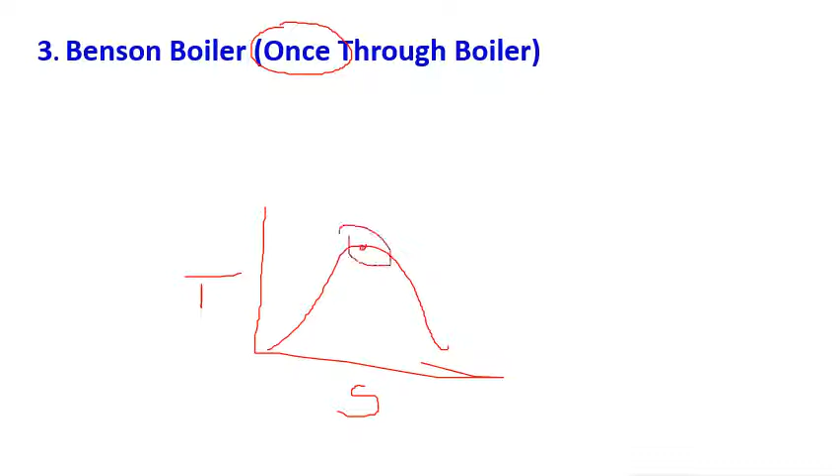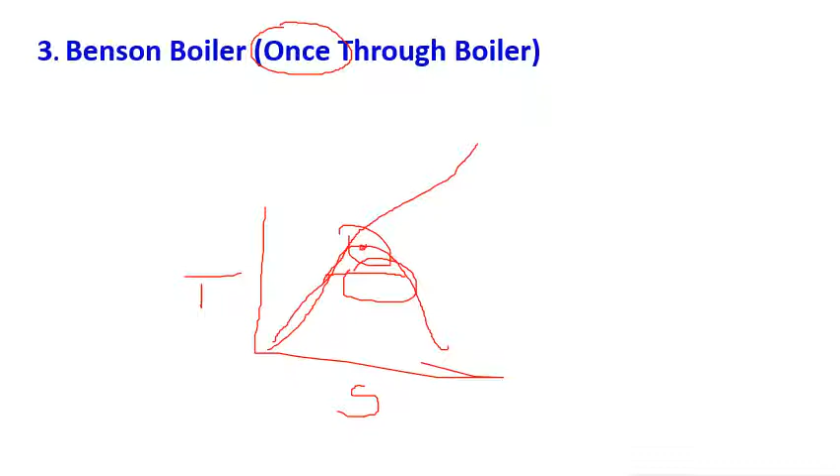Once through boiler means, as we have seen in the TS diagram in the earlier lecture, at 221 bar, the critical pressure, if I am taking water to saturated condition, it passes through stages. But if it passes above that point, there will be no phase change. There will be a sudden change to steam. That is what happens in the Benson boiler, called a once through boiler, where I don't have any drum.

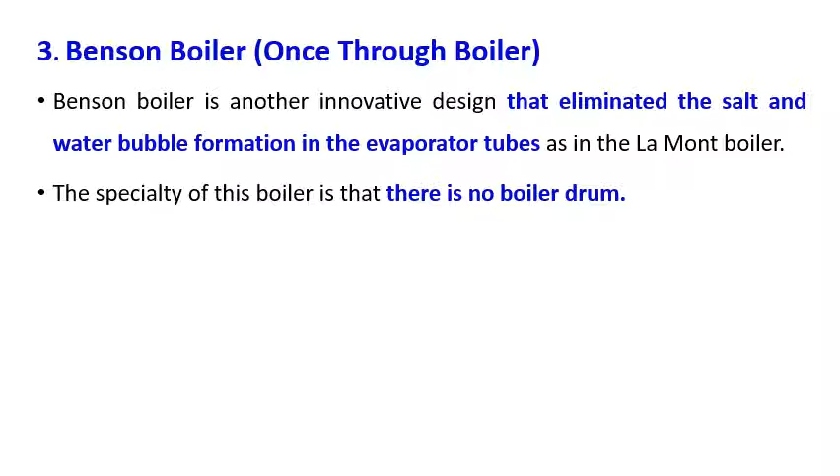The Benson boiler is an innovative design that eliminates salt and water bubble formation. The specialty is, as told, there is no boiler drum. If there is no boiler drum, the cost of the boiler reduces. The drum is the most weighty part of the boiler, so the weight also reduces, and erection during the initial period, which requires cranes, is also reduced. So overall, if the boiler drum is not there, this is the advantage.

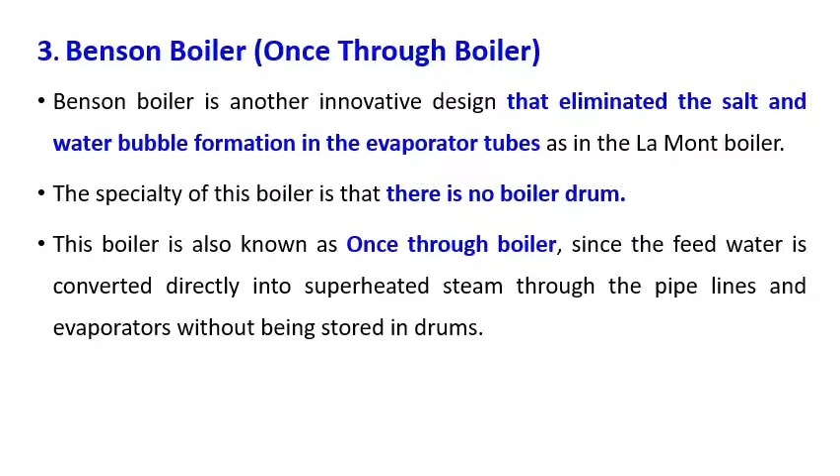This boiler is also known as once through boiler. Whenever there is no drum, it is called a once through boiler, since the feed water is converted directly to superheated steam through the pipelines, evaporated without being stored in drums. Earlier boilers like La Mont boiler or Loeffler boiler had steam drums, but here the steam drum is not there.

It passes to the radiant evaporator, then moves to the convective evaporator, then to the superheater, and the superheated steam goes to the turbine, the prime mover. The flue gas going out still has heat content, so I use ambient air through a blower or forced draft fan to trap that heat, which increases the efficiency of the entire system.

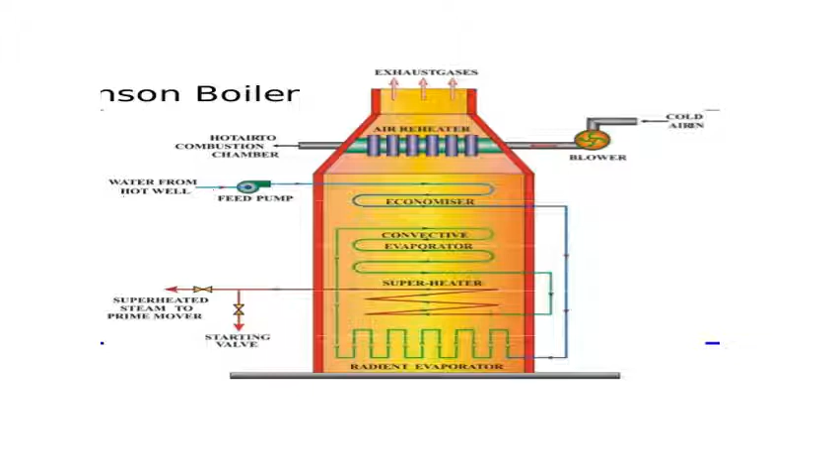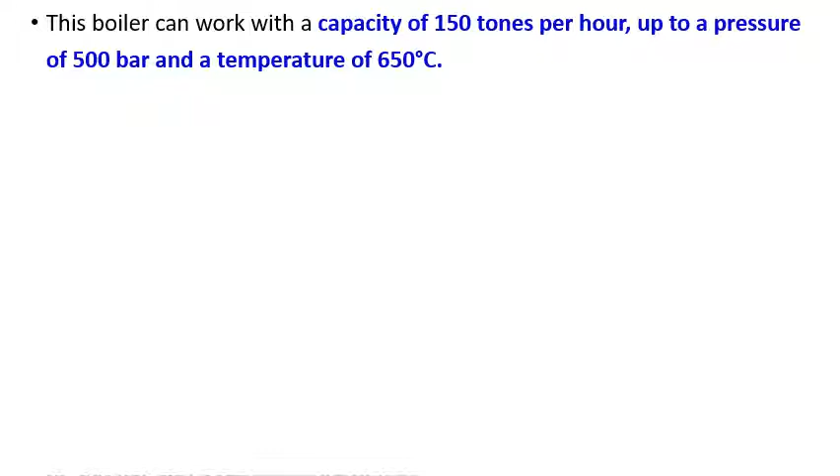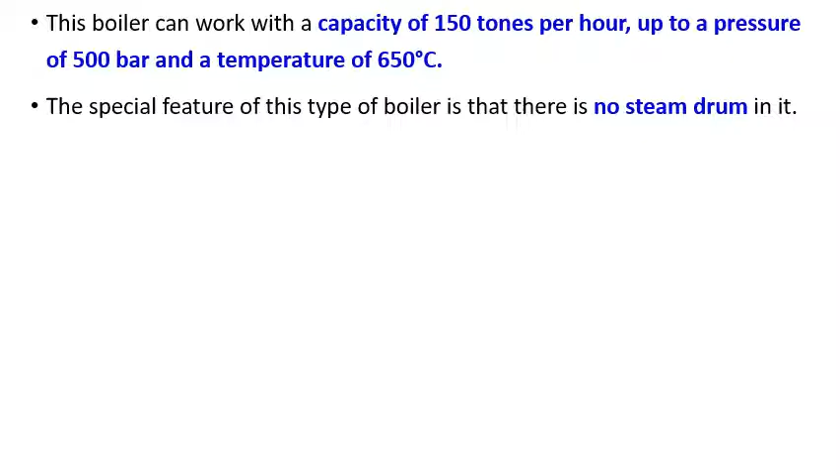Let us see the working. This boiler has a capacity of 150 ton per hour, and works at a pressure of 500 bar and 650 degree centigrade. 221 bar is the critical pressure, so this is much more than that. As already discussed, it is a drumless boiler.

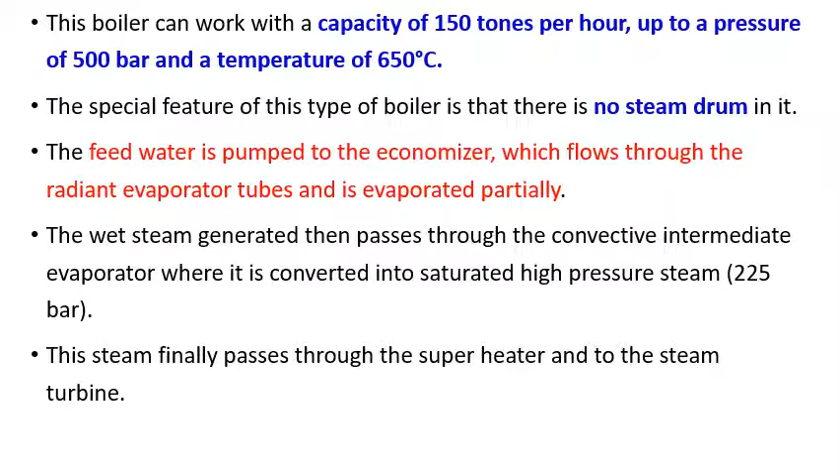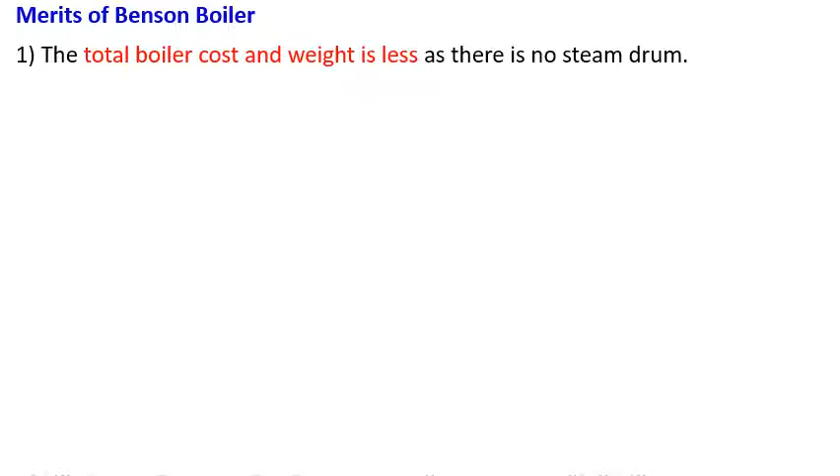Let us see the merits of the Benson boiler. The total boiler cost reduces since the drum, as told, is the costliest part, and erection to height also requires more time, so that has been avoided. The Benson boiler occupies lesser space area. All the joints are welded, and because of the lesser number of components, erection will be faster, giving flexibility for doing welding jobs for the tubes.

As this boiler works at high pressure, at 250 bar, there is no danger of bubble formation even when sudden fall of demand occurs. Possibility of explosion does not arise as there is no boiler drum. The Benson boiler can be started very quickly from cold.

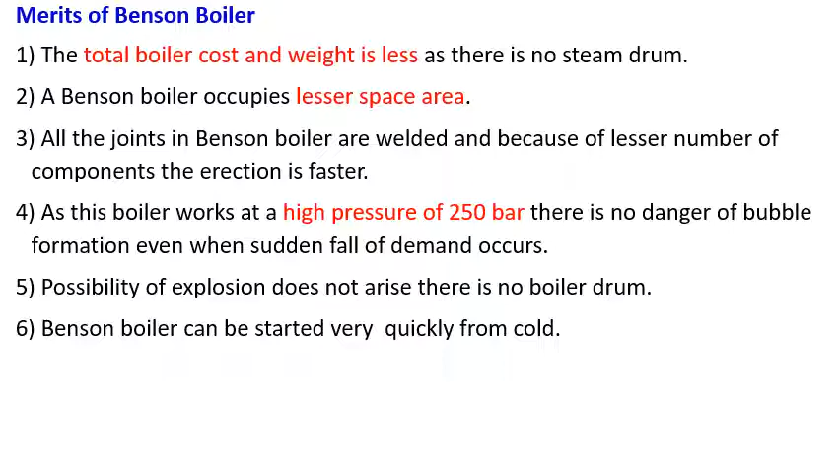Let us see the demerits. It has low steam capacity, hence not suitable for high power output. So it can be used for conventional purposes and for high pressure, but it cannot be used for high discharge.

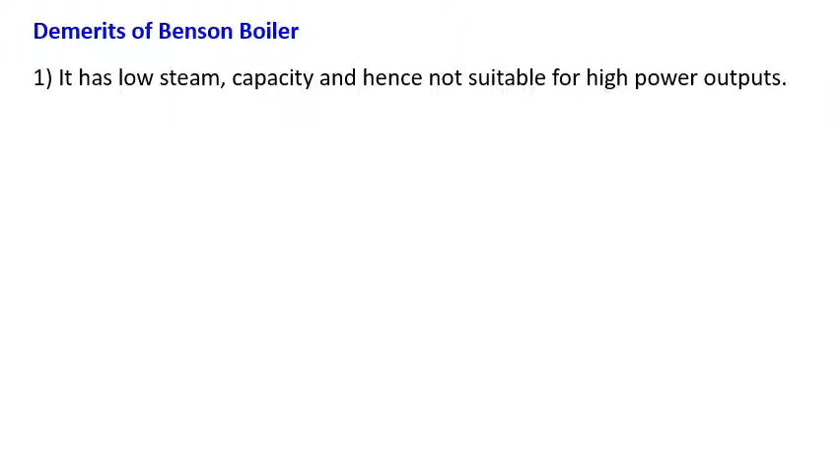There is possibility of overheating of the economizer and tubes. Since the drum is not there, risk is also there. You cannot say it is without any risk - risk involvement for explosion will be there.

In the drum, what happens? Generally we maintain 40 to 50% of the water level. So suppose in the drum, if the pump trips, I have got a little more time to play safe before any explosion, or I can start a spare pump.

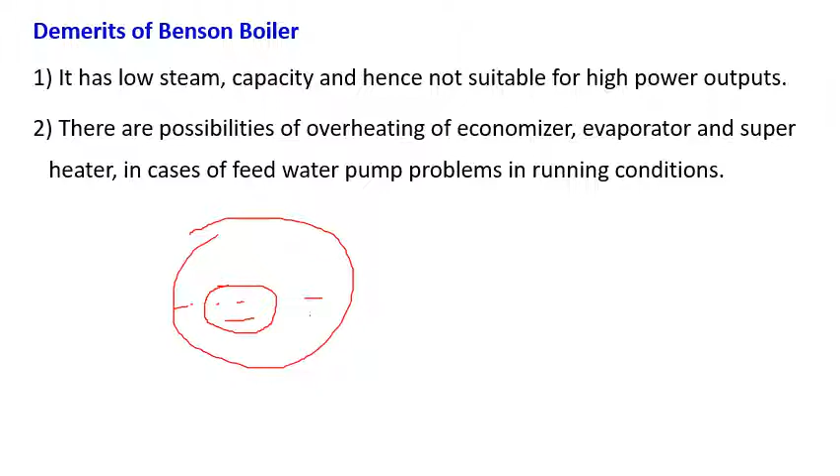I can think about alternative measures, but when it is in the Benson boiler, I cannot think about any alternative. Hence, the risk involved will be more. It cannot meet the sudden rise in demand.

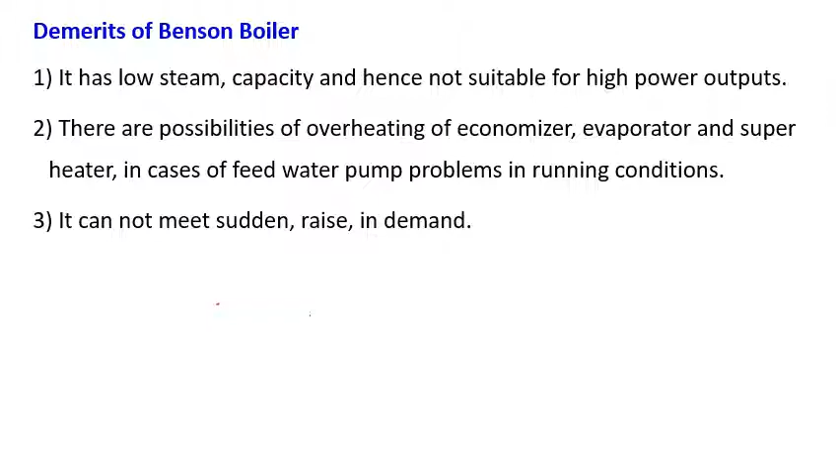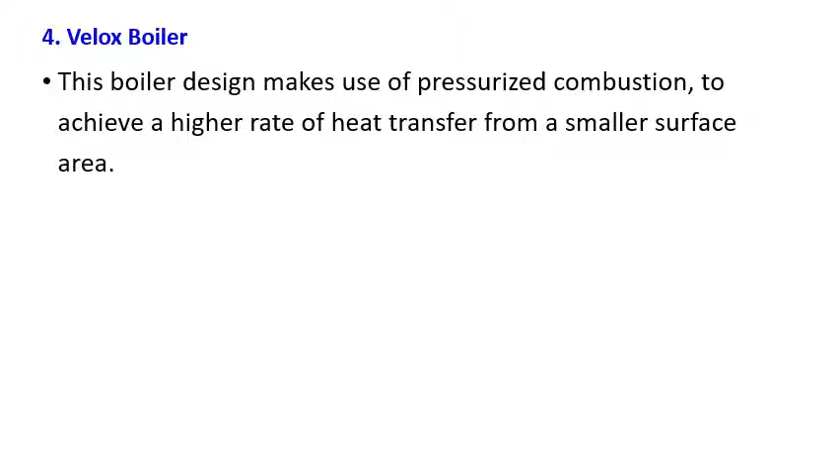Let us go to the next one, that is the Velox boiler. These boilers are designed to use pressurized combustion to achieve a high rate of heat transfer from a smaller surface area. The special feature is that the flue gases are expanded in the gas turbine. Generally we have seen the gas turbine or the Brayton cycle, right?

When I am having a gas turbine, the turbine and compressor are mounted on the same shaft. If you remember the basics from applied thermodynamics, we have a combustion chamber, a compressor and a turbine, mounted on the same shaft, and this is the combustor or furnace. So this Velox boiler system uses the turbine. Let us see the advantages of using this.

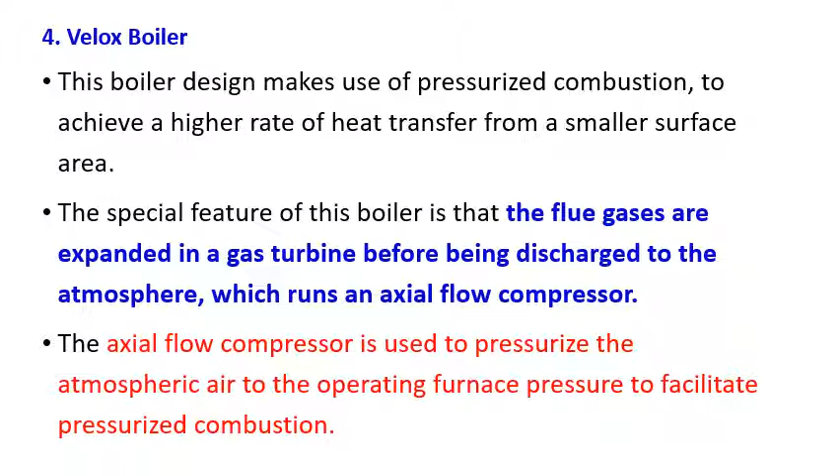The axial flow compressor is used to pressurize the atmospheric air to the operating furnace pressure to facilitate pressurized combustion.

The rest of the things, the evaporating tubes, are similar to what we discussed in the earlier boiler. Let us see the other feature.

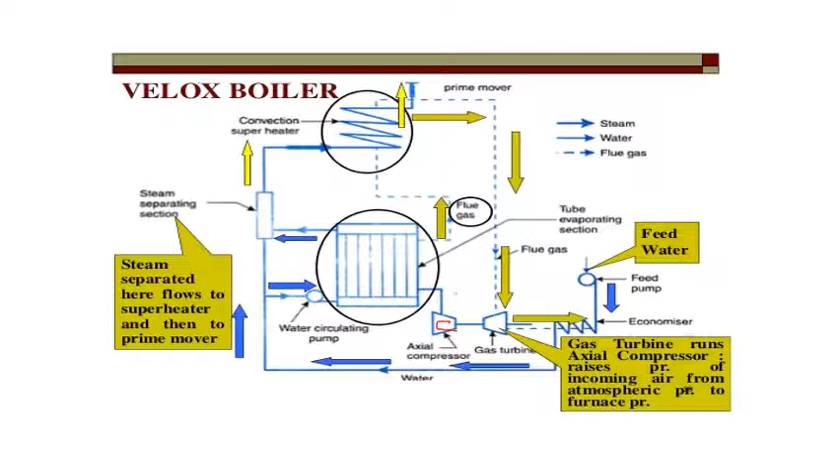The compressor is driven by the gas turbine through a reduction gear. Why? Because whenever I have a turbocharger, its RPM is generally more than one lakh RPM, so the compressor cannot be run at that speed. Therefore I want a reduction, so a gearbox is used here. This system thus makes efficient use of fuel in a smaller area for heat transfer.

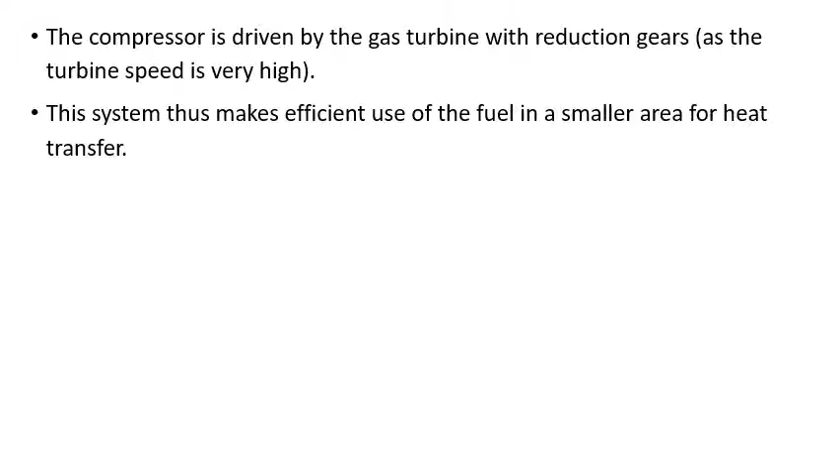In the steam line, the feed water comes from the economizer. The economizer is a heat exchanger which exchanges heat between the incoming water and the outgoing flue gas, so that the incoming water gets more temperature and the dumping of flue gas to atmosphere is reduced. The temperature of the dumped flue gas will be reduced; otherwise it will surely affect global warming.

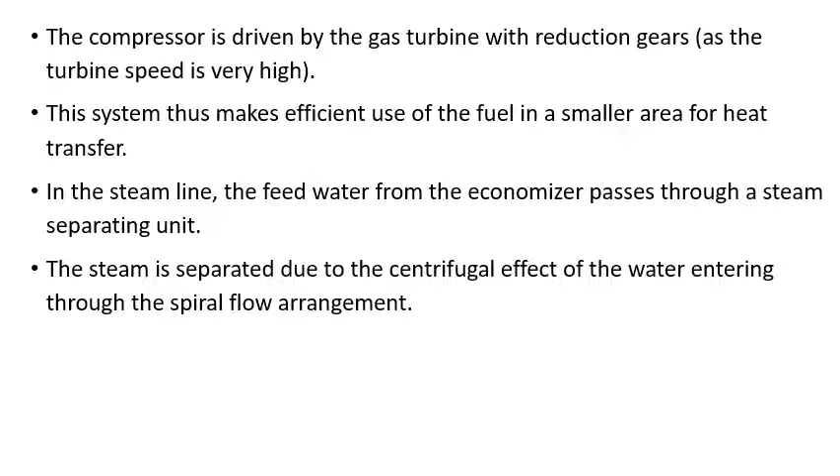The steam is separated due to the centrifugal effect of water entering through the spiral flow arrangement. Let us see the next one, the Schmidt-Hartmann boiler. What is the Schmidt-Hartmann boiler? Its specialty is that we make use of two steam pressure circuits or two loops for the water-steam system.

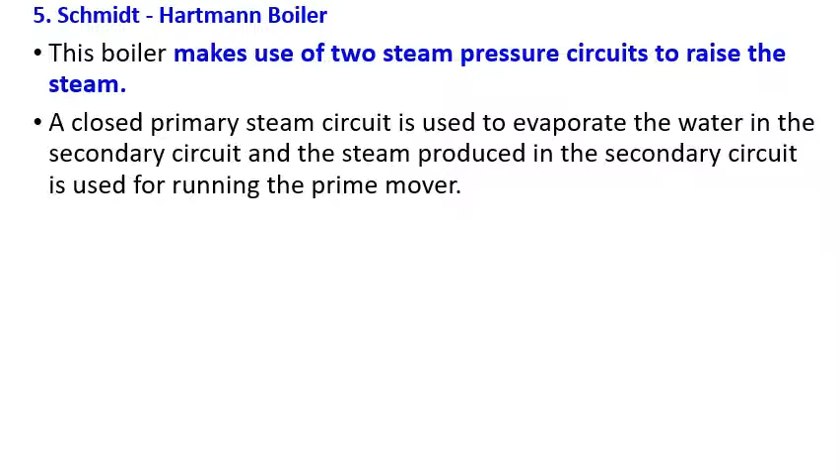The closed primary steam circuit is used to evaporate the water in the secondary circuit, and steam produced in the secondary circuit is used for running the prime mover. The closed primary circuit uses distilled water, and the steam is raised to a pressure of 100 bar. This steam is used to generate steam in the secondary or main evaporator. This is achieved by submerging the heating coil in the evaporator of the primary circuit.

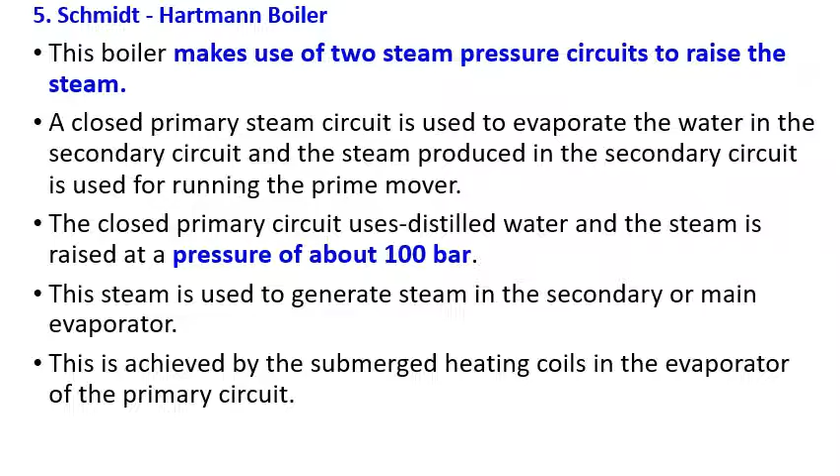Let us understand this concept by looking into the sketch, and the different parts of the Schmidt-Hartmann boiler. As we already studied, this is the air preheater. By using a fan or blower, I can heat the incoming air. There is a circuit for the pump where I am taking the water. This is called the primary circuit and this is called the secondary circuit. This is not present in the earlier boiler we studied.

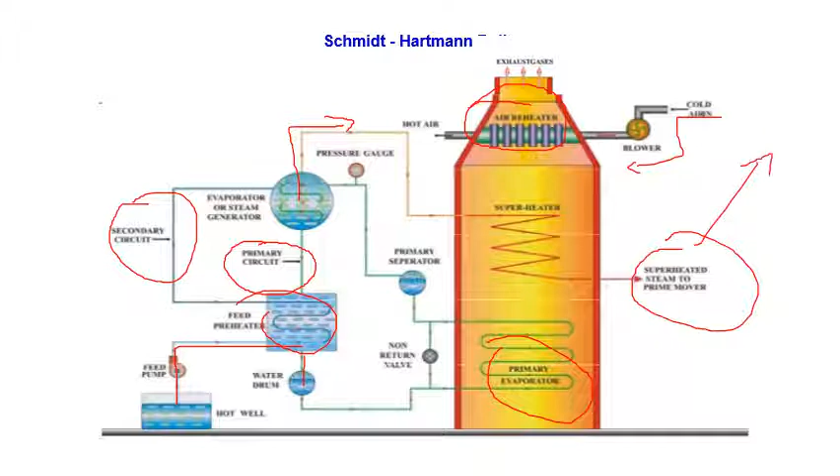So water will be pumped to the water drum and preheated by means of a preheater. Then it will go to the primary evaporator, where the first separation takes place, and it will enter the steam drum. From the steam drum it will go to the superheater, from where it moves to the turbine or prime mover. So this is the working principle of the Schmidt-Hartmann boiler, by which it is more effectively utilized.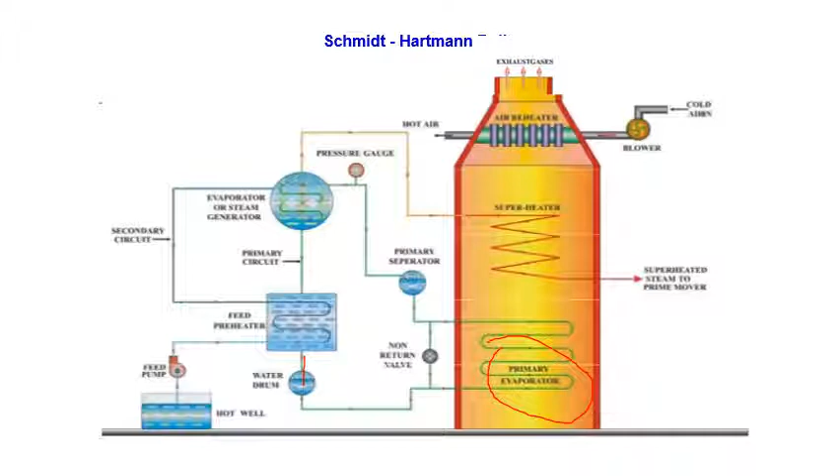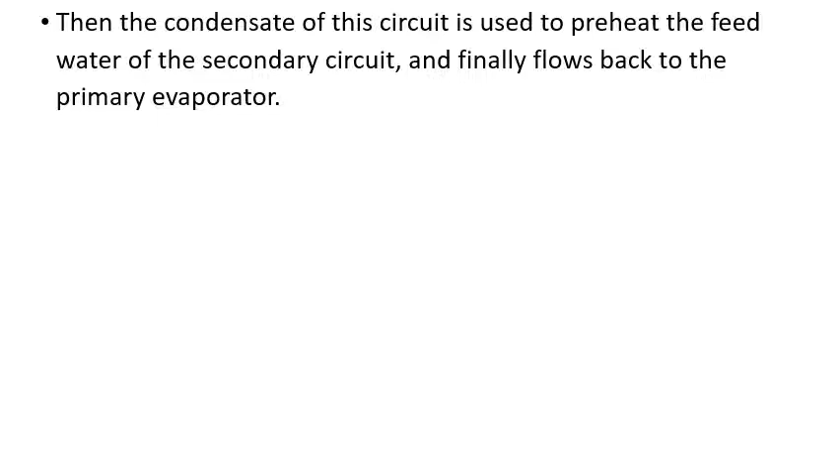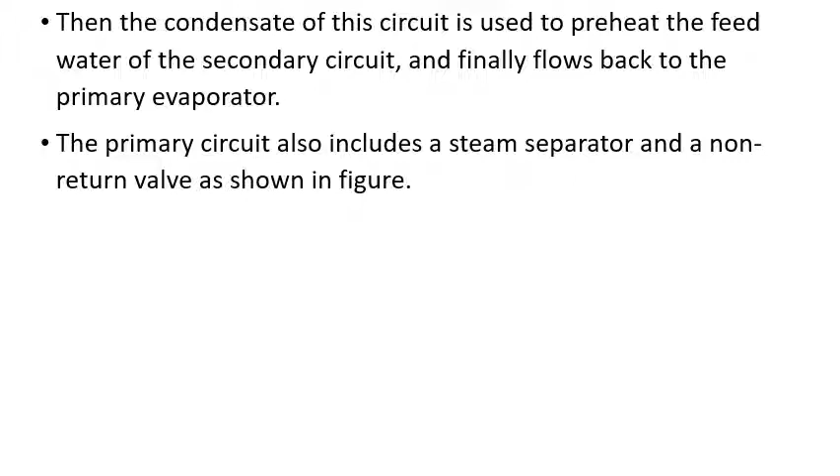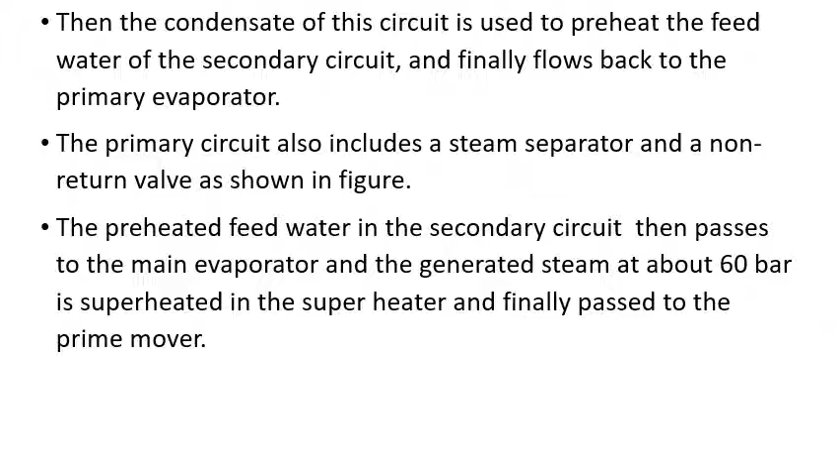Then the condensate of this circuit is used to preheat the feed water of the secondary circuit, and finally flows back to the primary evaporator. The primary circuit also includes a steam separator and a non-return valve, as we discussed in the figure. The preheated feed water in the secondary circuit then passes through the main evaporator at about 60 bar is superheated in the superheater, then finally passes to the prime mover. Thank you.